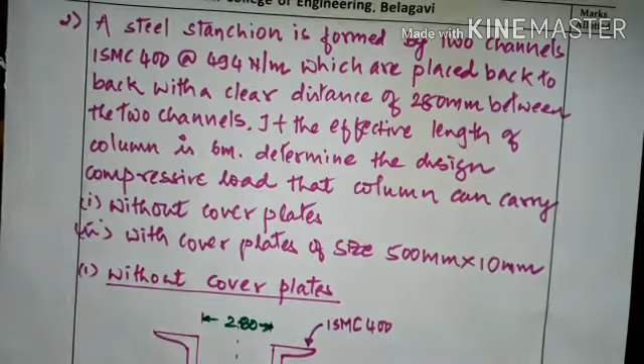In this session we are going to solve one more problem to calculate the design compressive strength of a member. Without wasting time, I'll read out the problem for today's session.

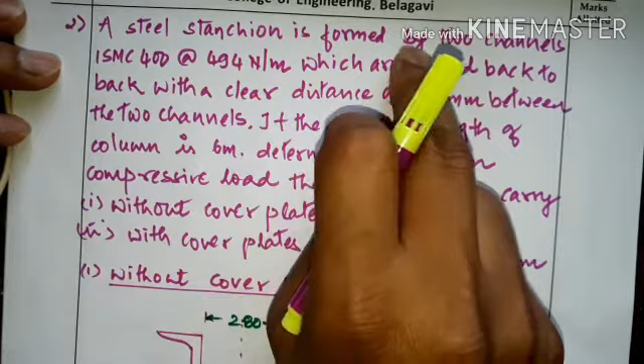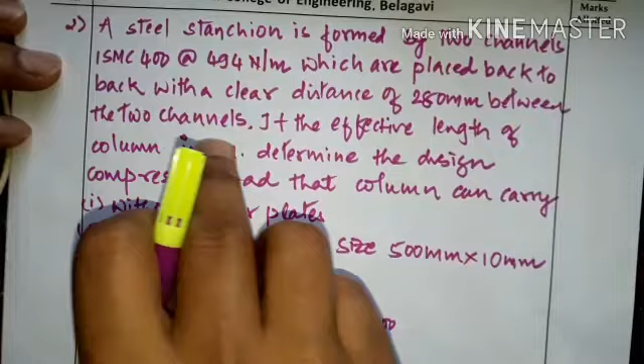A steel stanchion, which is nothing but a column, is formed by two channels, ISMC 400 at 494 Newton per meter, placed back to back with a clear distance of 280 mm between the two channels. If the effective length of column is 6 meter, determine the design compressive load that column can carry.

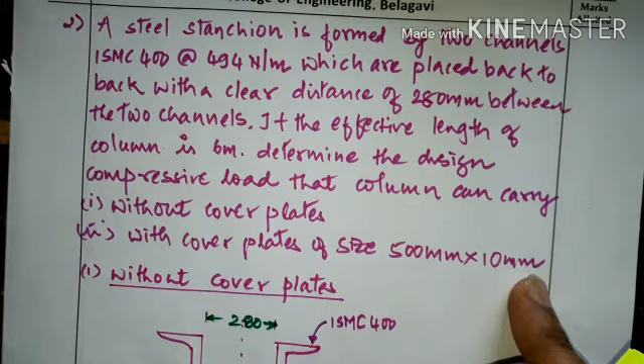If the columns without cover plate and with cover plate of size 500 mm by 10 mm. So we have to find out the design compressive strength of two channel sections placed back to back at a distance of 280 mm center to center, with the effective length of 6 meter.

They have given two conditions, that is without cover plate and with cover plate. Both of these we have to find out.

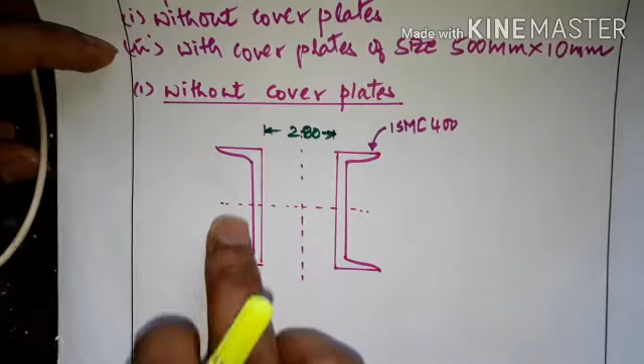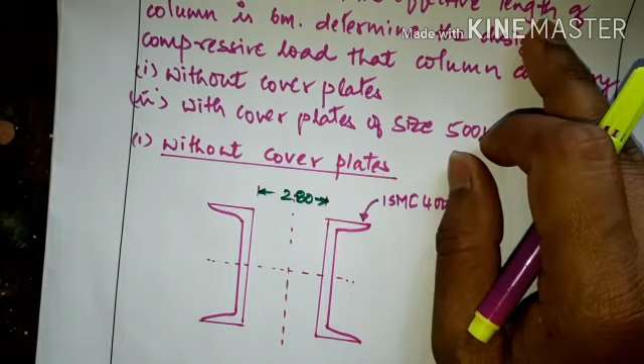According to the first case, that is without cover plate, there are only two channel sections ISMC 400 placed back to back at a distance of 280 mm center to center. We have to find out what is the design compressive strength, or what is the load carrying capacity, of two channels placed back to back at this distance.

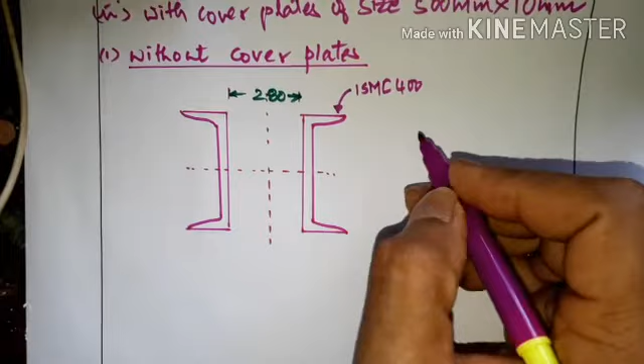So we'll start with the solution now. First of all we have to note down the section properties from the steel table.

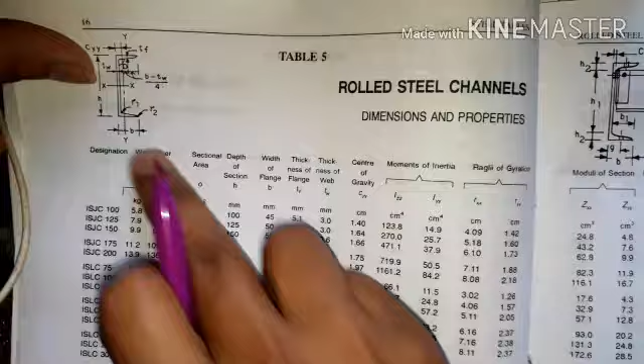When you go to the steel table, you can refer here. This is for rolled steel channels. You can see the channel section here. In that, the important properties like area and moment of inertia, all those things you have to note down.

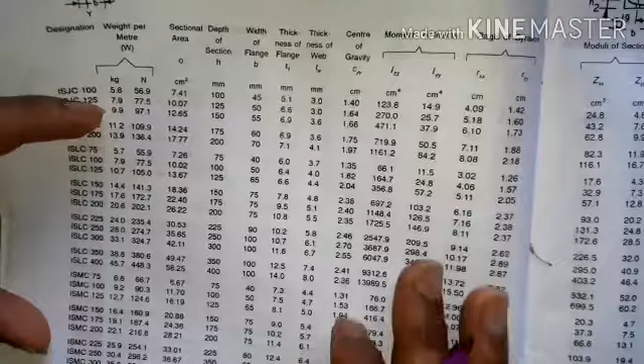Here it is ISMC 400. From ISMC 400 at 494, sorry, it is 484. For that we have to note down the properties. Once again I will check, you have to note down the properties for this.

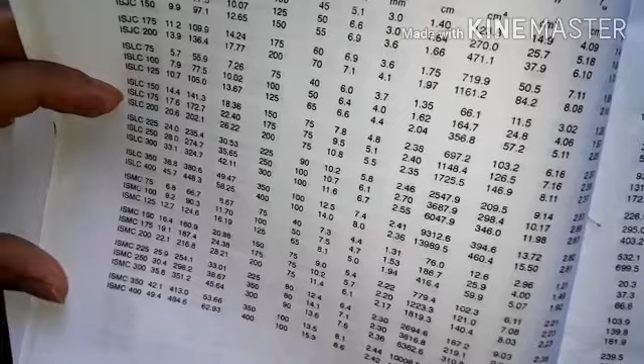So I will just note down these properties from the steel table now, so it will be easier for the calculation.

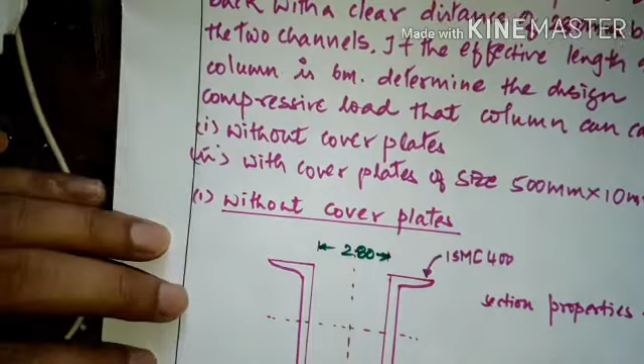First the area from the steel table, that is A. It is 2 times, because there are two channel sections, and the property of a single channel is 6293. So we will get it as 12586 mm square.

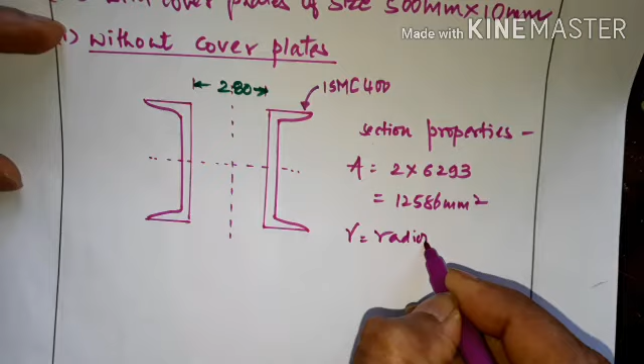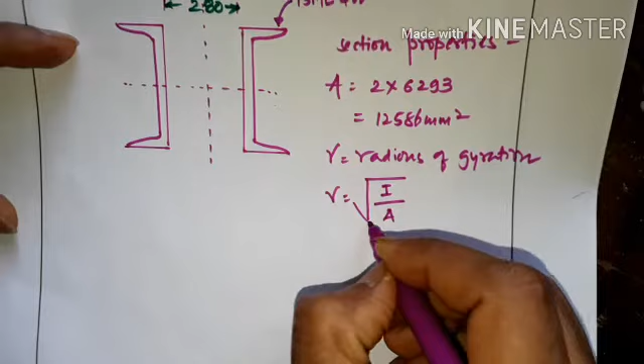After that, next is R, that is radius of gyration. Here we cannot use it directly from the steel table, because in the steel table it is given for a single channel section. For a double channel section you have to find out by using the formula, that is R is given by square root of I by A.

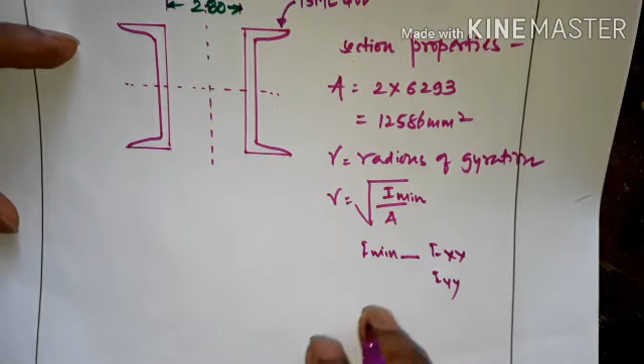R is equal to square root of I by A, that is I minimum, minimum moment of inertia. I minimum is nothing but the least of Ixx and Iyy. So we have to find out its moment of inertia, that is Ixx and Iyy.

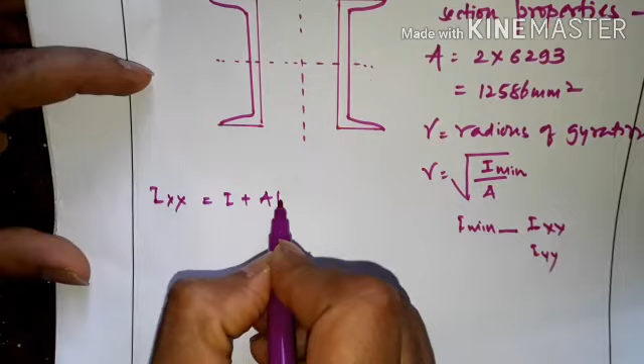So we will calculate the Ixx, which is I plus A h square. I plus A h square, for both xx and yy axes.

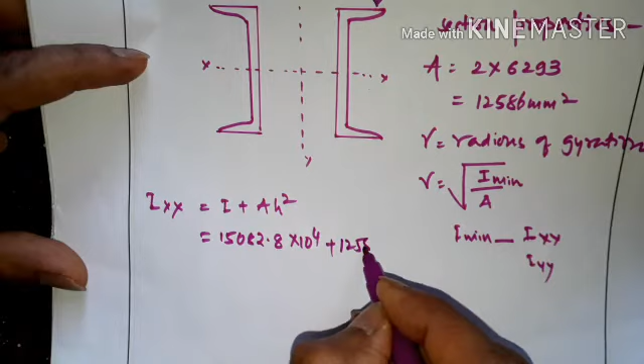So Ixx of the channel section, if you check, you will get 15082.8 into 10 raised to 4. This is the Ixx of the channel section plus area, and area is 12586, into h.

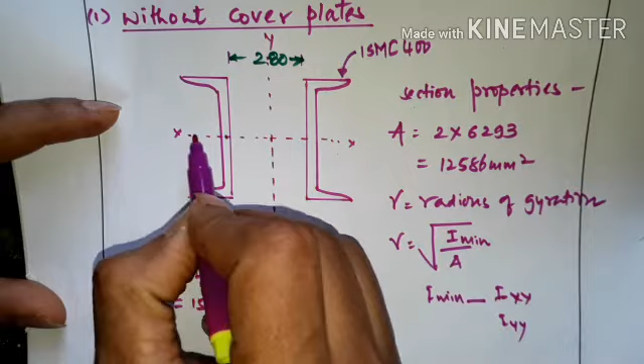h is now we can see it is about the horizontal axis xx, and we have to locate the center of the channel section from the main centroid. If you check about the horizontal axis, the center of the channel section and the xx axis are coinciding, so your h will become 0.

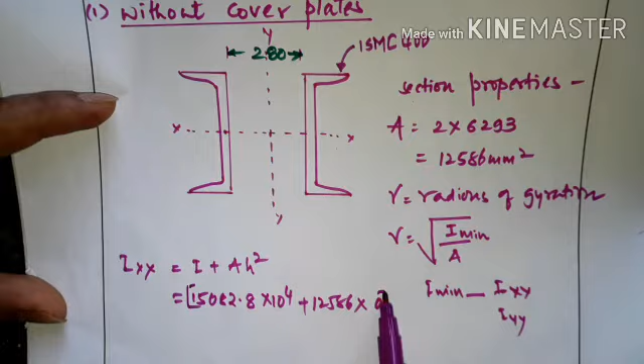So A h square, this whole term will become 0, into 2 because there are two channel sections. So this you will get it as 301.65 into 10 raised to 6 mm raised to 4.

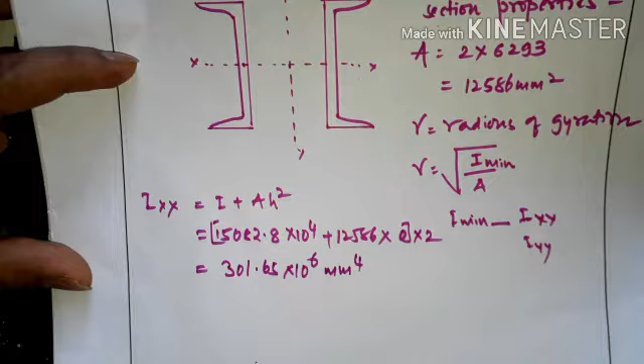So this is regarding Ixx. Next, regarding Iyy.

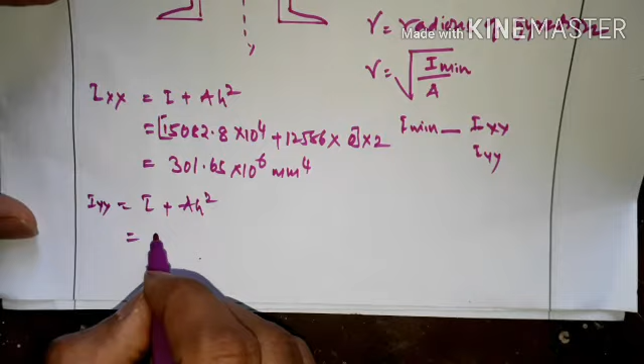Okay, Iyy, so again it is I plus ah square. So again Iyy of channel section you have to note down. That is 504.8 into 10 raised to 4, because this is given in centimeter raised to 4, so you have to multiply into 10 raised to 4 to convert into mm.

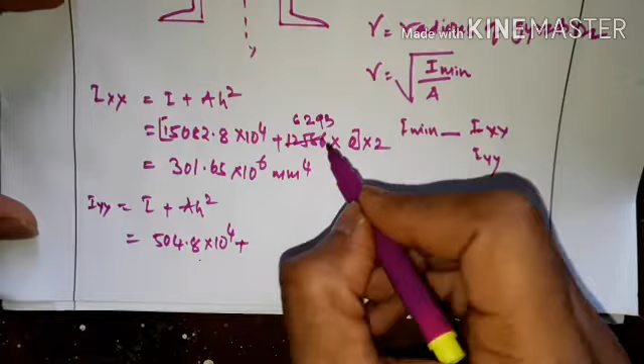Plus I plus area, if you consider here, this area should be 6293, because here we are multiplying into 2. That doesn't matter here because this term will become 0, because area into 0 is 0 only.

But here it is 6293. I plus a, I, that is Iyy of channel section, that is 504.8 into 10 raised to 4 plus area I plus a into h square. Ab h dekho hamara kya hai.

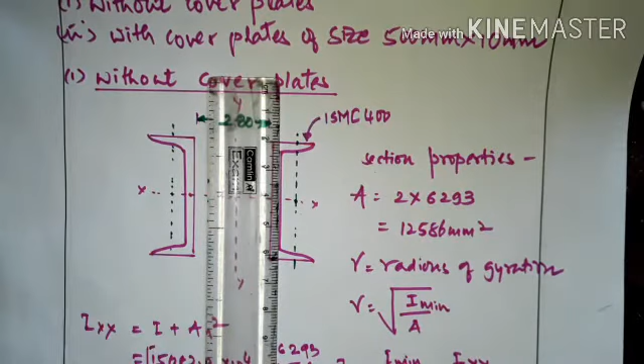It is somewhere here. You can see this is the vertical axis, this axis is the vertical axis.

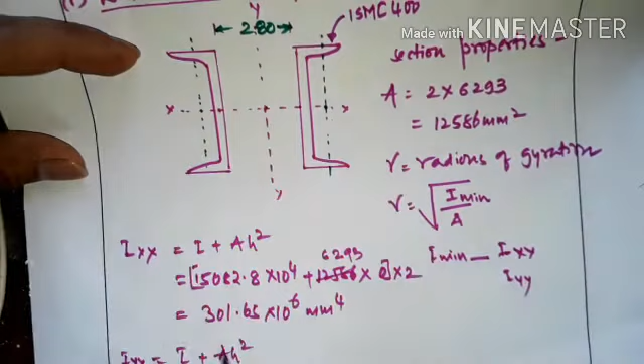So now we have to calculate I plus a h square. Let's see what h will be, I'll put a bracket here. So first of all, from center to its center, how much will it be, 280/2, so that is 140. So this is total 140.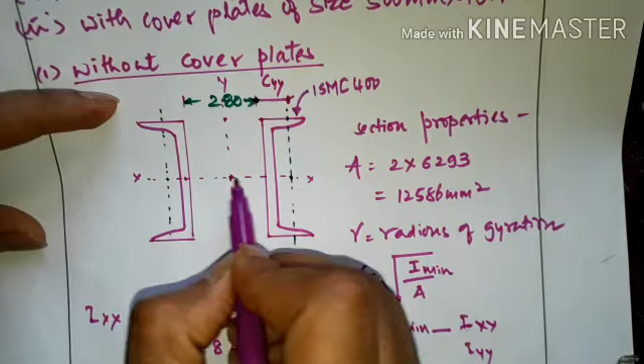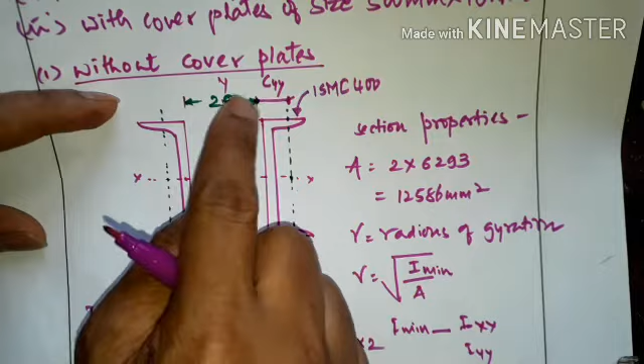Now I will multiply into 2, I plus a, because this thing is there twice, so this will get as 349.43 into 10 raised to 6 mm raised to 4.

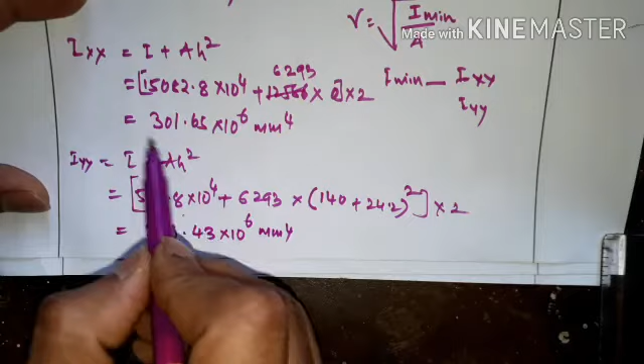So you have got Ixx and Iyy. So we have to choose I minimum, the minimum between xx and yy. Now which one is minimum between both? The minimum is Ixx.

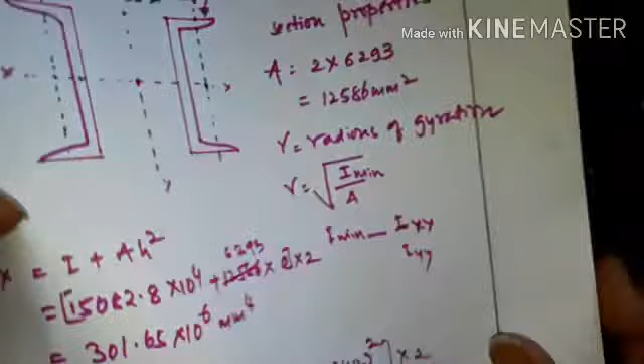So therefore I minimum is equal to Ixx. So that is 301.65 into 10 raised to 6 mm raised to 4. Okay, I minimum is Ixx.

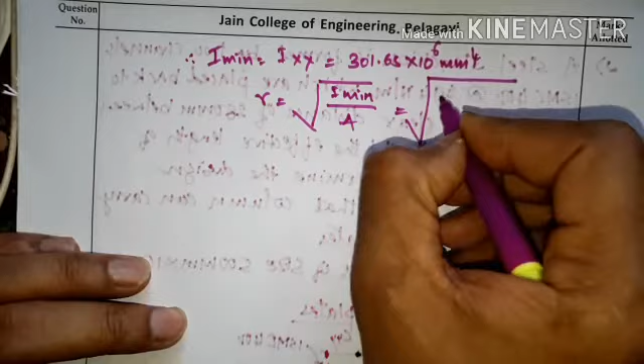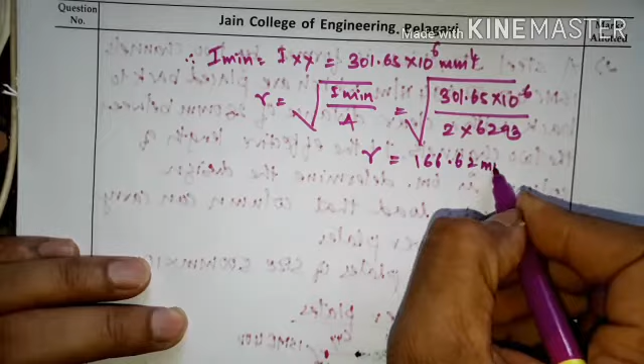So therefore R is equal to square root of I minimum by area. So square root of I minimum is 301.65 into 10 raised to 6 and area is 2 times 6293. So you will get the value of R is equal to 166.62 mm.

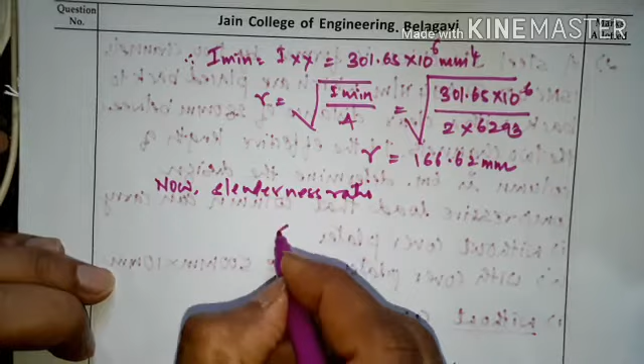So therefore now slenderness ratio lambda is equal to KL by R minimum. K into L is effective length. So directly it is given as effective length of the column, I think 6 meter. So that is 6000, divided by R minimum which is 166.62. So therefore lambda will get as 38.75. The lambda value is 38.75.

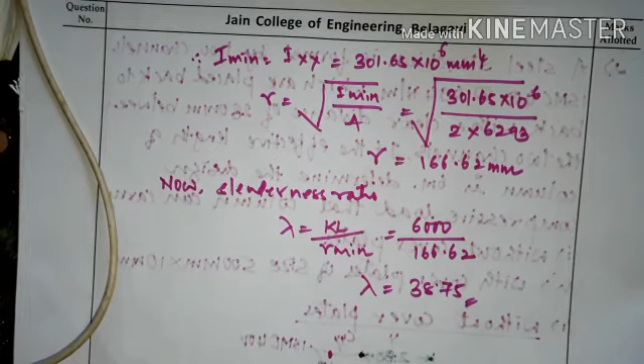Now next, what do we have to do? You have to go to the design compressive stress table, design compressive stress table, to find out FCD.

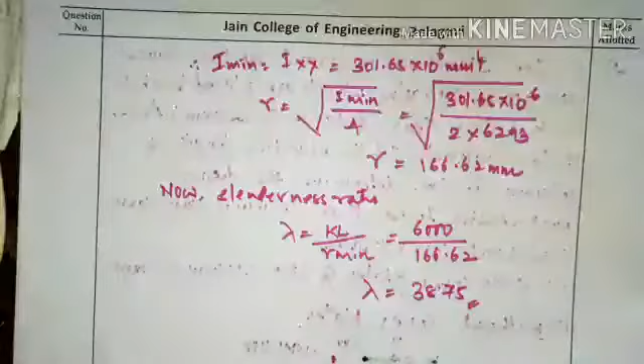So you have to go to the design compressive stress table. There are table 9A, 9B, 9C and 9D. So we have to refer which table, whether A, B, C or D? For that what do we have to do?

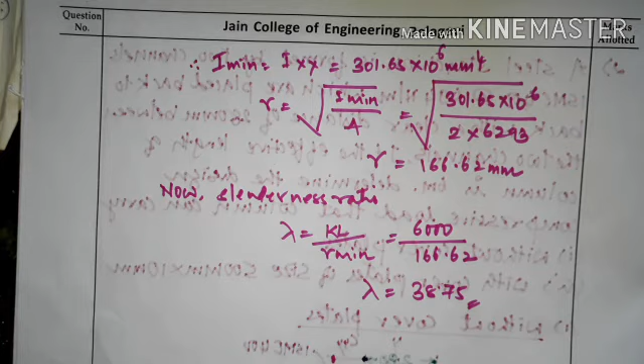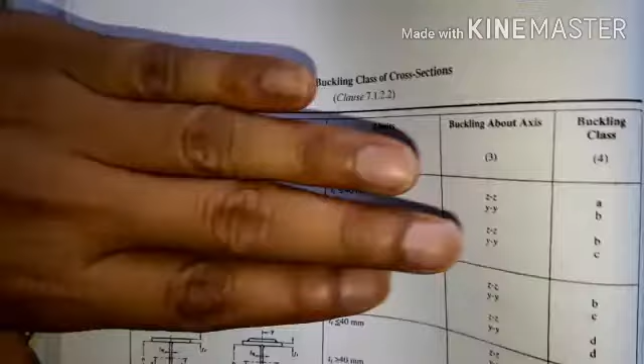You have to go back to page number 44, that is table number 10, buckling class. You have to find out its buckling class. If you open the table, I've already told you how to use it in the first session.

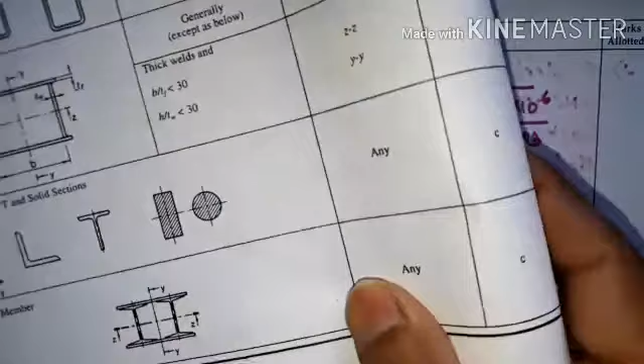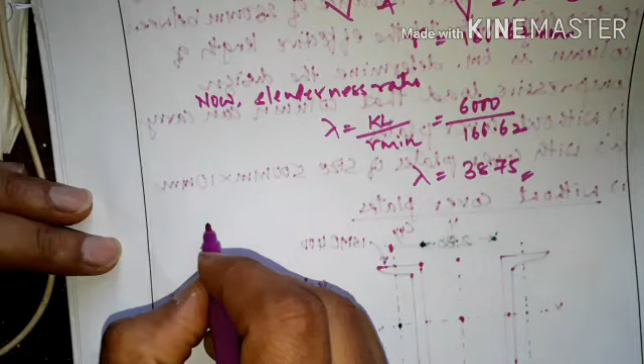So I write here: as per table number 10, page 44, buckling class is equal to C. Our buckling class is C.

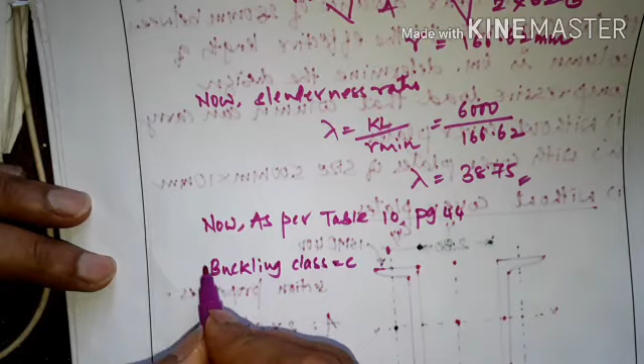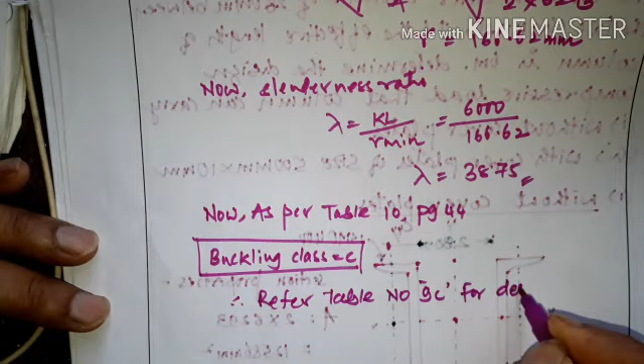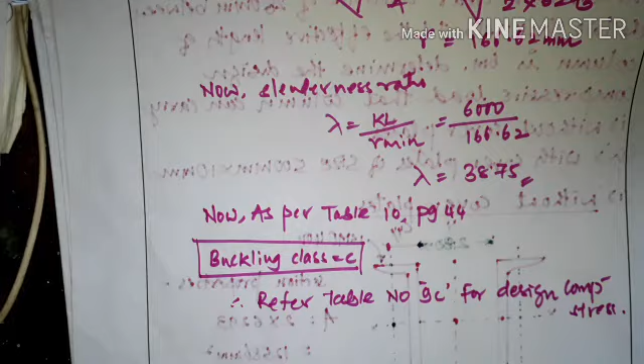So we have to refer, therefore refer table number 9C for design compressive stress. What you have to do - you have to refer table number 9C for design compressive stress. So I'll go back to table 9C for calculation of design compressive stress FCD for buckling class C.

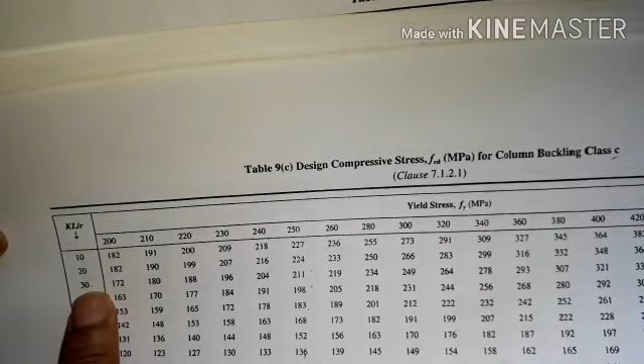Again here the value of KL by R minimum - whatever the value, we have to interpolate between 30 and 40, because our value is 38.75, so we have to interpolate between 30 and 40. For that the values are: for 30 it is 211 and for 40 it is 198. So you have to interpolate between these two.

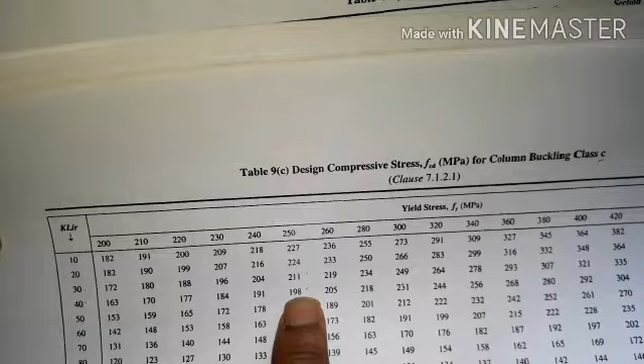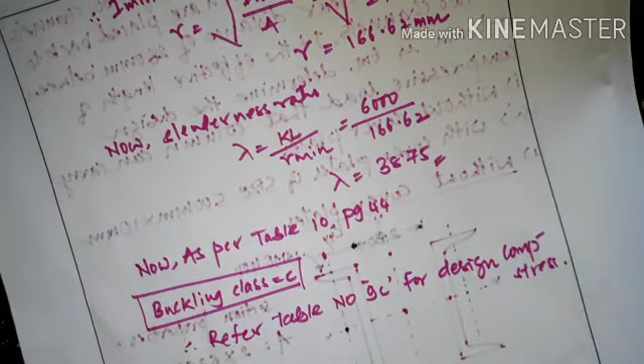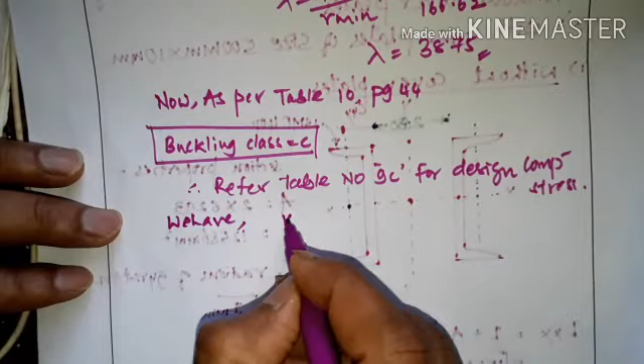Understood? So I'll just note down the values. So we have KL by R, and the value of FCD here. KL by R is 30 and 40. For 30 the value is 211, and for 40 the value is 198.

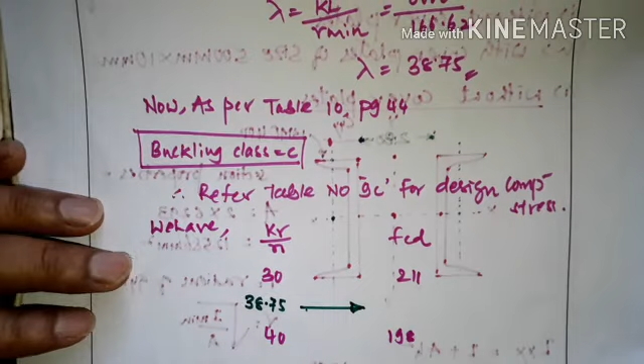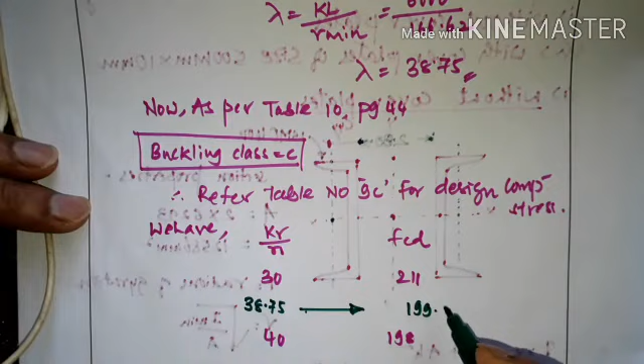So we have to get the value for 38.75. You can see here. We have to find out the value for 38.75 by interpolation method. After interpolating, you will get this value as 199.625. You have to be very careful while interpolating and while choosing the values.

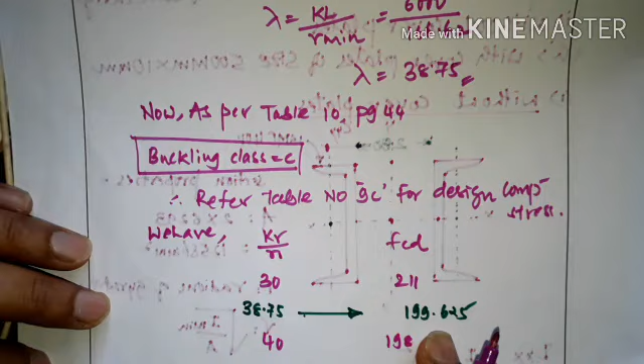For 30 it is 211, for 40 it is 198, so for 38.75 we have got the value as 199.625 kilonewton. Sorry, this is Newton per mm square - 199.625 Newton per mm square.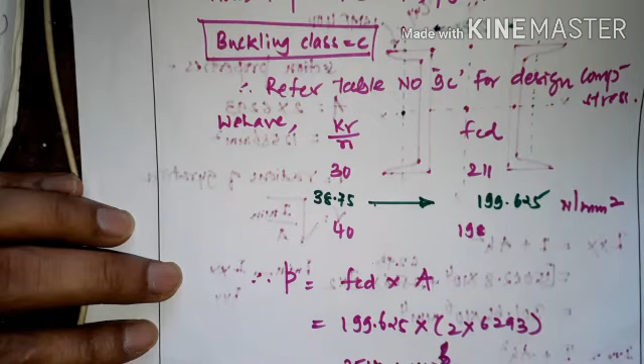So therefore P is equal to FCD into area. So FCD is 199.625 into area, we have got it as 2 times 6293. So that is equal to 2512.4 into 10 to the power 3 Newton, or 2512.4 kilonewton.

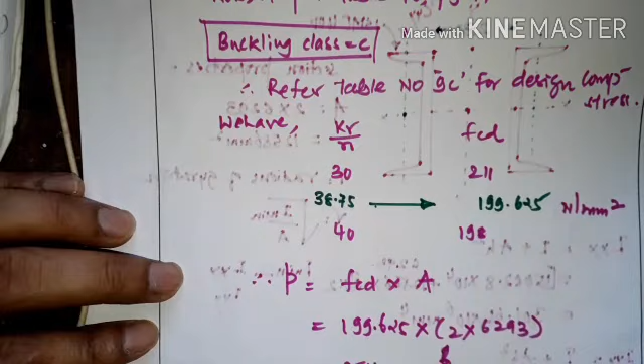So this is the final answer. We have got the load carrying capacity or the design compressive strength of a channel section without cover plates as 2512.4 kilonewton. So I'll just repeat the procedure.

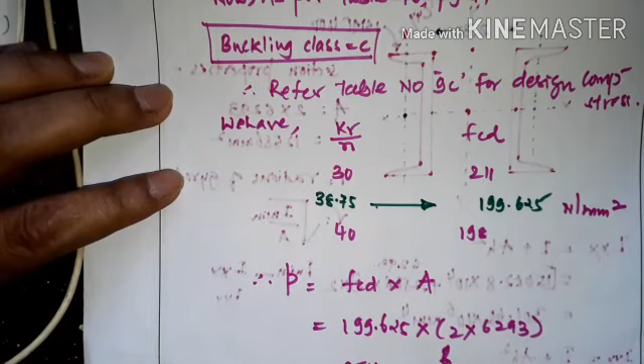What you have to do - first you have to note down the properties from the steel table. Then after noting down the properties, first we have to find out lambda. Lambda is nothing but KL by R minimum. So R minimum is square root of I minimum by A.

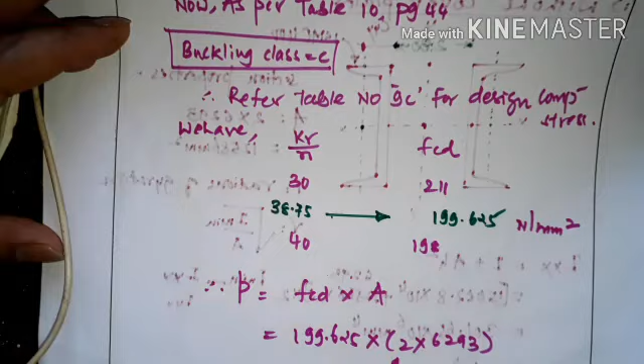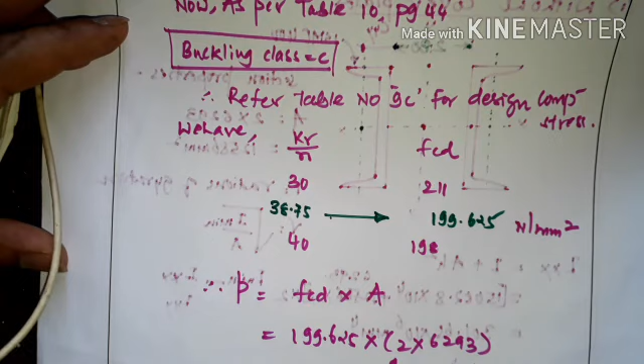Okay, these are the steps you have to follow to calculate the design compressive strength of a particular section. Okay, thank you.